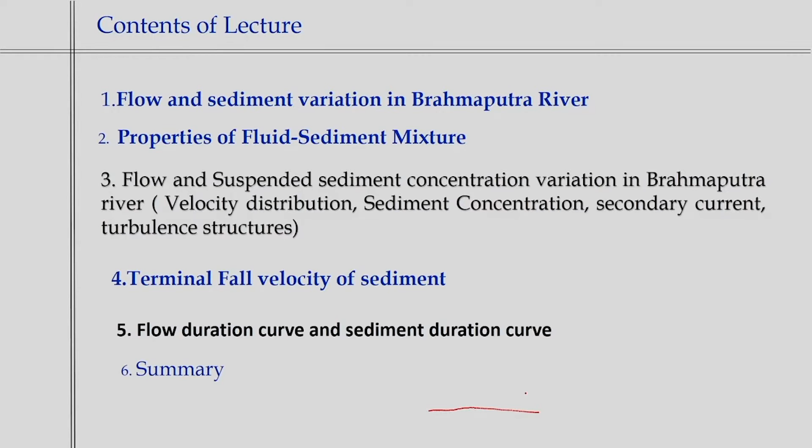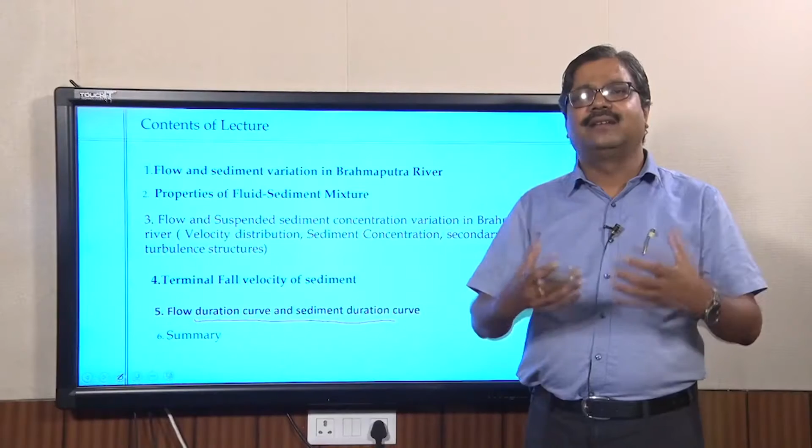Again I will come back to the river scales to show how flow and suspended sediment concentration varies. Then we'll come back to sediment particles and discuss what the terminal velocity of sediment particles would be, both theoretically and combined with experimental findings. Then, very interestingly, we'll talk about the flow duration curve and sediment duration curve analysis at river reach scales, and conclude these lectures.

Let's go to the next slide where I'm showing the river survey of the Brahmaputra river. If you look at these satellite photographs from Google Earth, the river width at this stretch comes to more than 10 kilometers. So you can understand what the width of the river is - 10 kilometers - that's the width of this river.

Not only that, if you look at the flow variability, the discharge variability - how much discharge varies in these rivers. For low flow, it starts at about 3000 meter cube per second. It's very low flow. During the dry seasons, we'll have flow which is about 3000 meter cube per second. 1 meter cube is equivalent to 1000 liters, so you can understand how much water is flowing.

The average flow of this river comes to about 12,000 meter cube per second - so much variability of flow. Average flow is 12,000 and low flow is 3,000 meter cube per second, and the maximum flow observed during a 10-year return period flood comes to about 40,000 meter cube per second. So it's a mega river system. The flow variability starts from 3,000 to average 12,000, then goes up to 40,000.

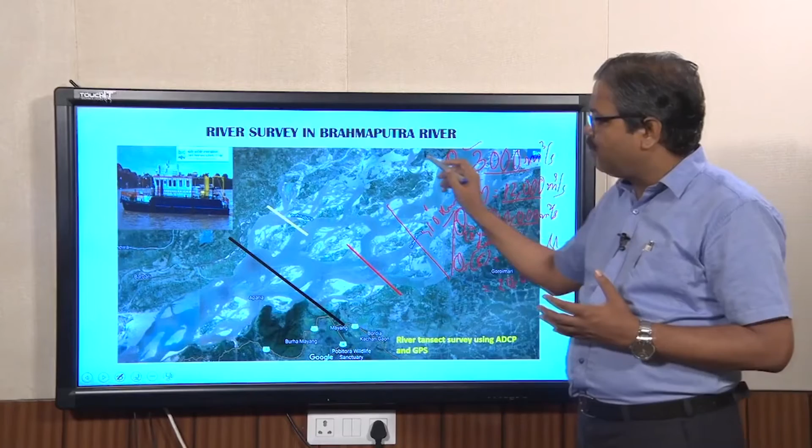You can see such a complex river system, confluencing, deconfluencing, forming bars and all. So if we look at this type of river system and try to understand rivers, we need knowledge on how sediment-laden water flow happens, how mechanics is developed in that, and how far we can understand it. That's the basic objective of this course - to take it to a level where we can understand such complex river systems, how the morphology is changing, and how sediment erosion and deposition are happening.

All this process we try to understand with our basic knowledge of fluvial hydrodynamics. We will talk about more details. The river doesn't mean just water flow, it's a mixture of fluid and sediments. There is always sediment present, except in very low flow periods, and sediment concentration increases exponentially when we have a larger flood or event. So mostly we try to understand how these fluid-sediment mixtures happen.

If you talk about sediment concentration, it's a very simple concept. If you take a control volume, Vs is the volume of the sediment particles, Vf is the volume of the fluid, the total volume of this control volume will be Vf plus Vs. The sediment concentration by volume will be Vs divided by Vf plus Vs. So as sediment Vs increases, C will increase.

That's very basic. Most of the time we don't do analysis at the volumetric level, we do it at mass conservation equations, momentum equations, energy equations. So we always link with mass, not volume. If I find out the concentration by mass, denoted as small c, that's the mass component of the sediment particles divided by the total mass of the system, which is easy, just multiply by the respective density - rho s stands for density of sediment particles, rho stands for density of water. So you can compute the sediment concentration by mass.

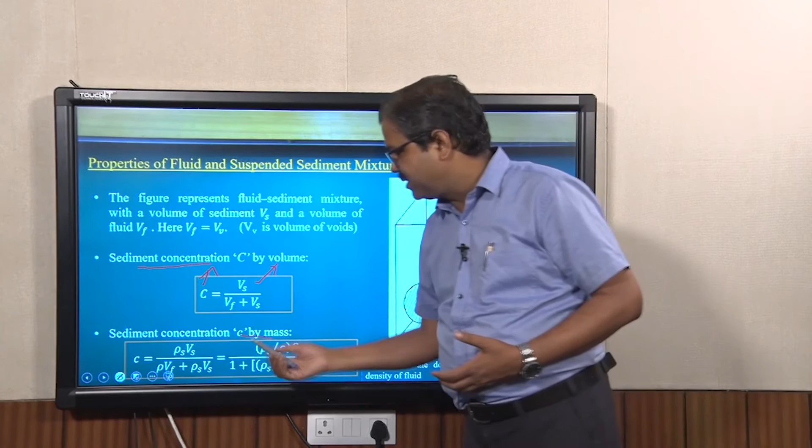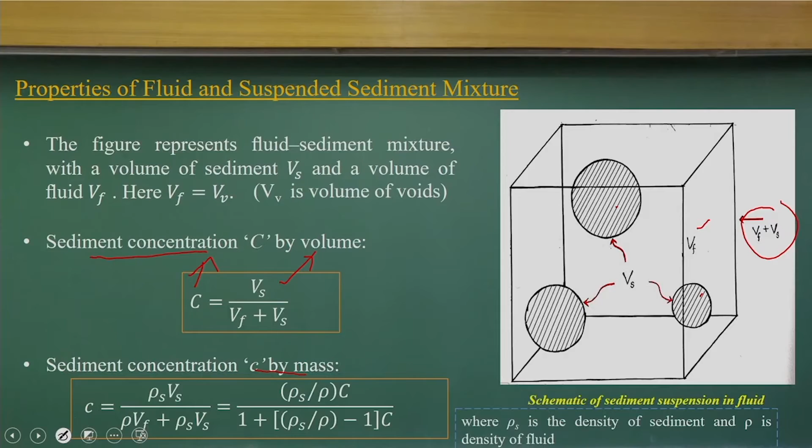This C by mass tells how much sediment concentration happens per unit volume, and if you substitute to capital C, you get it in these terms. So don't confuse whether C is in terms of volume or mass - you can convert between them. If volume level data is given, you convert it to mass level, or vice versa. It's a very simple calculation to find the concentration.

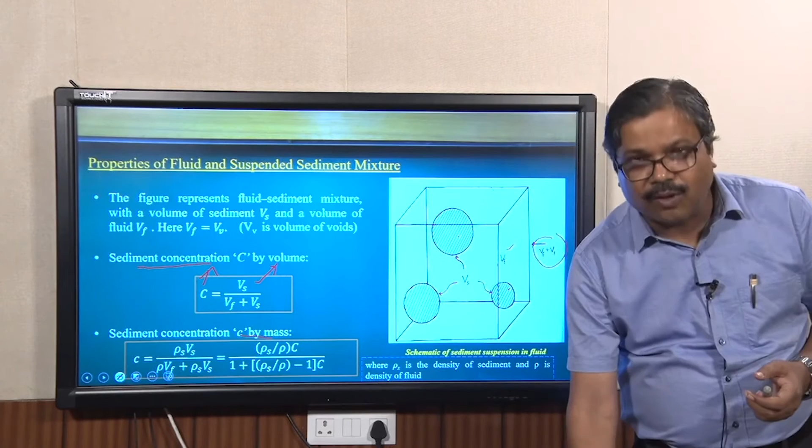When you talk about fluid and sediment mixtures, what will be the density? We find mass per unit volume for the mixture as the sum of the liquid part and the sediment part - the mass is the sum of the mass of the water part and the sediment particles part. The same way we get the specific weight of the fluid and sediment mixtures. Again, this is a fluid sediment mixture, try to understand that.

Now, many times in fluid mechanics flow we talk about Newton's law of viscosity - that is Newtonian fluids, the relationship between shear stress and shear strain rate, related through dynamic viscosity. Because we use fluid and sediment mixtures, the dynamic viscosity will not exactly be that of water. Experimental data clearly establishes that the fluid and sediment mixture's dynamic viscosity is a function of the dynamic viscosity of water and correction factors for the sediment concentration.

C is in terms of the volumetric sediment concentration - the fluid is mixed with sediment particles, try to understand this. As I increase the sediment concentration, there will be more viscosity. That's the correction factor from Bagnold's paper - these are all values more than one, so that's the correction factor. If I consider the fluid sediment mixture and I know the C value, I can compute the dynamic viscosity of the water and sediment mixture, which is necessary for us.

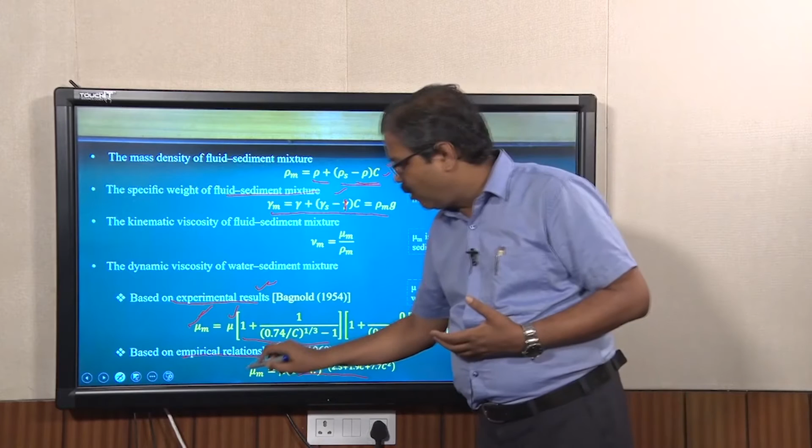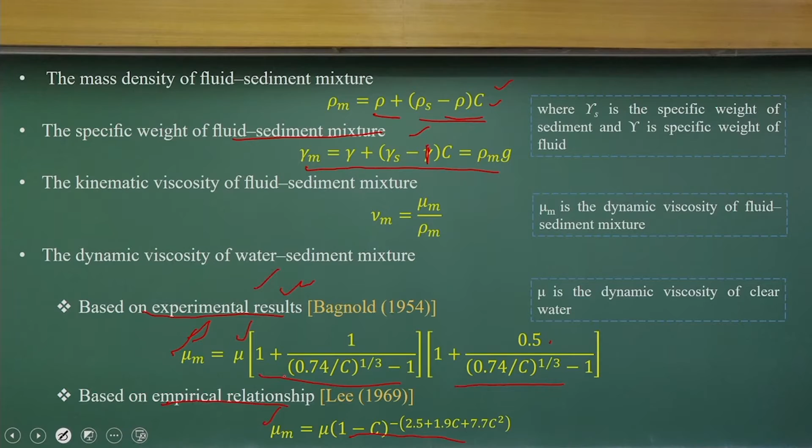We can find out the dynamic viscosity of the water and sediment mixture particles from experimental data. Let me go through a very simple example to show how we can compute it. Consider a volume of 2×10^-3 meter cube of river water, evaporated to collect the suspended sediment concentration, which gives us the weight of the sediment.

Then you have the D50 value and the specific gravity S. You try to compute the C value, the sediment concentration by volume and by mass, then find the mass density, specific weight, and dynamic viscosity of the fluid-sediment mixture, given mu for clear water. These are simple problems applying the formulas discussed earlier. The only difference is that from the specific weight we can find the Vs value, and knowing Vf, we can compute capital C and small c.

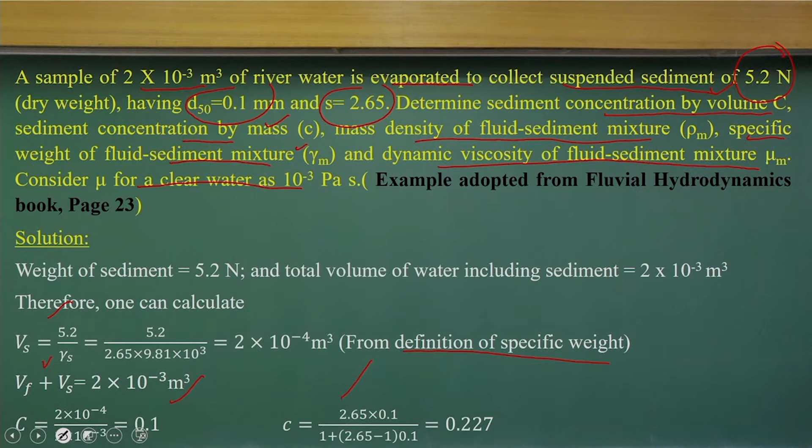Same way, if I apply it, I can get the density of the fluid and sediment mixture, which is much higher than the water density of 1000 kg per meter cube. Because of the presence of the sediment mixture, the density of the water and sediment mixture is more than 1000 kg per meter cube, which comes out to 1165 kg per meter cube.

Same way you can compute the dynamic viscosity. Just substitute the C value, with mu known to us. You can see that mu-m is a higher value than clear water because of the presence of the sediment concentration factors.

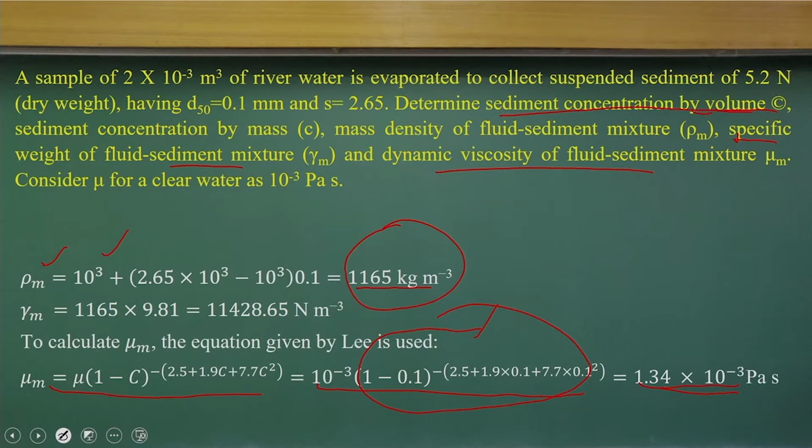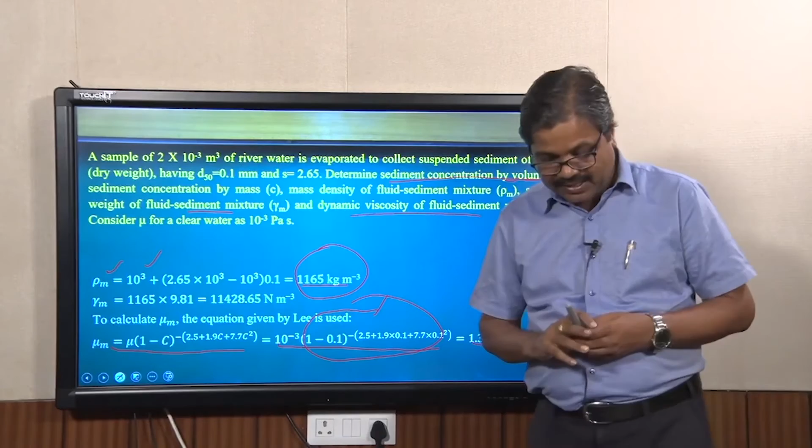This is a simple example to demonstrate how we can compute things if we know the sediment concentration. You go to the river, collect suspended water samples, evaporate them, weigh the evaporated suspended sediment, then do this type of calculation to find the dynamic viscosity, specific weight of the sediment particles, and sediment concentration by volume and mass. We can do this easily: just go to the river, collect water samples, do the evaporation, find the remaining solid sediment particles, take the weight, and find out all these fluid-sediment properties. That's the basic procedure. Now let's go to the next slides.

Again I am coming back to the river. So, the Brahmaputra river - as I introduced earlier, we are fortunate to have collaborations with the Inland Waterways Authority of India to do extensive river surveys of these big river systems, 10 km wide. I present this interesting data to you: if you go to a river like this, with a 10 kilometer reach, we cannot do simple surveys. We need survey vessels equipped with global positioning systems.

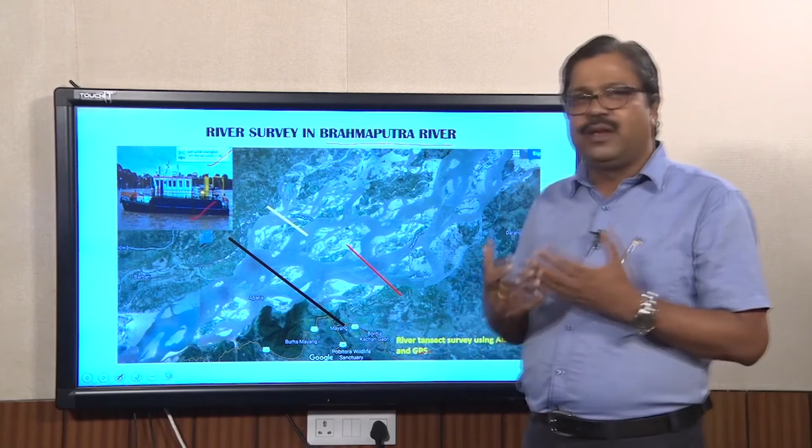Everywhere now we have global positioning systems equipped with ADCP, acoustic Doppler current profilers, which measure the three-dimensional velocity components, the depth, and the suspended sediment concentrations. More details you can browse through the literature to see what ADCP is and how to use it. When you use these survey vessels equipped with GPS, ADCP, and echo sounders to survey a transect of more than 10 kilometers width, it takes more than 5 hours. So it's not an easy job to survey a river like the Brahmaputra with a 10 kilometer width.

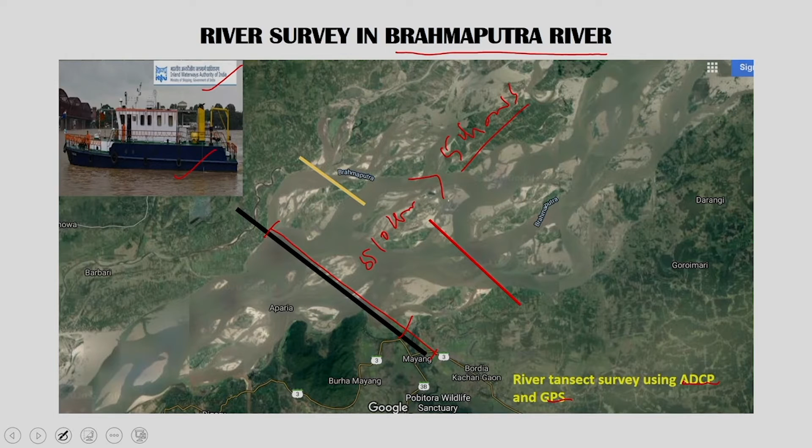Let me present the data to show how complex these rivers are - we cannot simplify the river the way we usually do. This is raw data that we got in the field, not generated data. This is measured field data from the Brahmaputra.

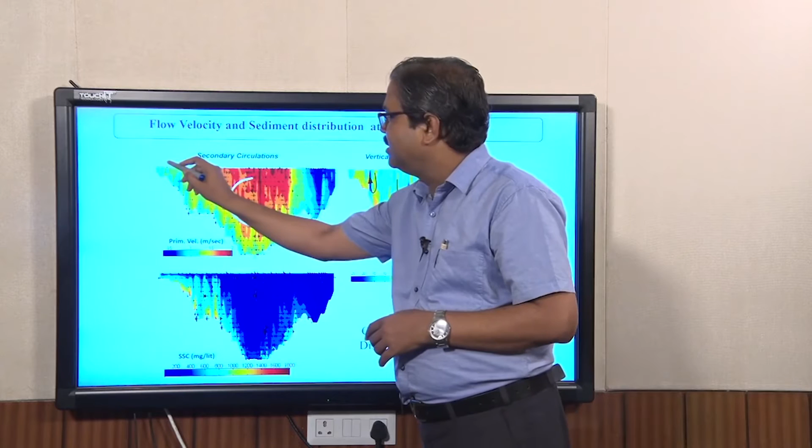If you look at the three velocity components - one is the primary velocity component in the longitudinal direction, there is a vertical velocity component, and a horizontal one perpendicular to that. This is the cross section, with a width of a few kilometers, and these colors represent different velocities. If you look at the red color zones, they represent about 2 meters per second.

If you look at the core zone, the velocity is about 2 meters per second, but there are reaches where the velocity is lesser than 0.3 meters per second, 1 foot per second. There are also reaches where the velocity is more than 2 meters per second. That means the velocity variation is from 0.3 to 2 meters per second, almost 10 times.

Within these cross sections there is a velocity difference, and this is a natural river. You can see the velocity difference and how it shows up. That's what is called the primary direction.

But if you look at these velocity vectors given in the perpendicular to the longitudinal direction, you can see these velocity vectors, and from that you can see that large vortex formations are happening. That's what we call the secondary current. You can easily see that.

So when you measure this velocity using the ADCP, you can see these velocity variations in the longitudinal direction in a cross section. Similarly, there will be velocity variations perpendicular to that, and there are formations of secondary currents, which are large vortex formations. You can see it from that.

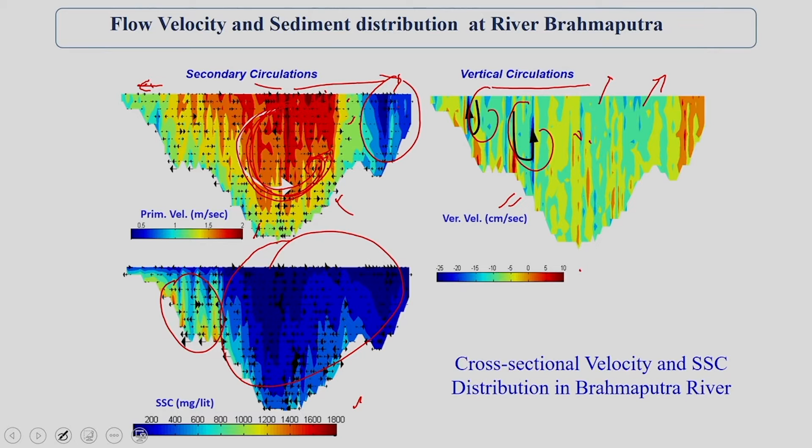If you look at the suspended sediment concentrations, which I said earlier ranges from 400 milligrams per liter to 20,000 milligrams per liter, you see these regions get on average 300 to 400 milligrams per liter. But there are stretches where sediment concentration can go as high as 800 milligrams per liter. Just look at the variability - these are original field survey data which we have. Nobody in the world has these data sets.

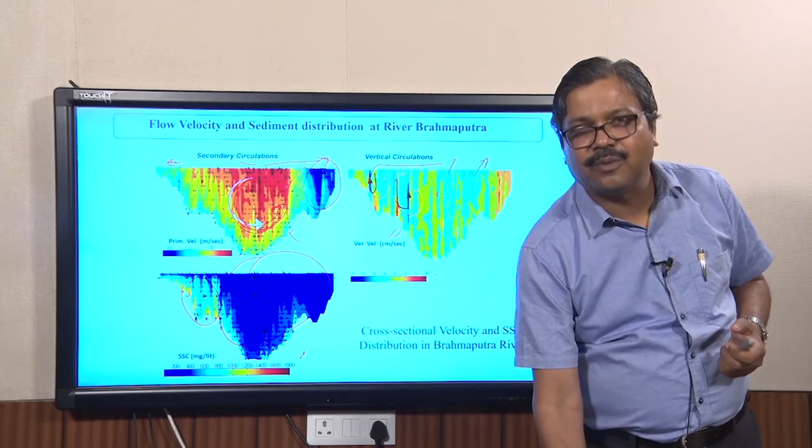There are formations of secondary current, and variability in primary velocity, vertical velocity, and suspended sediment concentrations. That's the reason the river is complex, and we try to understand the river from a mathematical point of view, a physical concept point of view, and also by conducting river-scale experiments - that's the strength of the work we are doing.

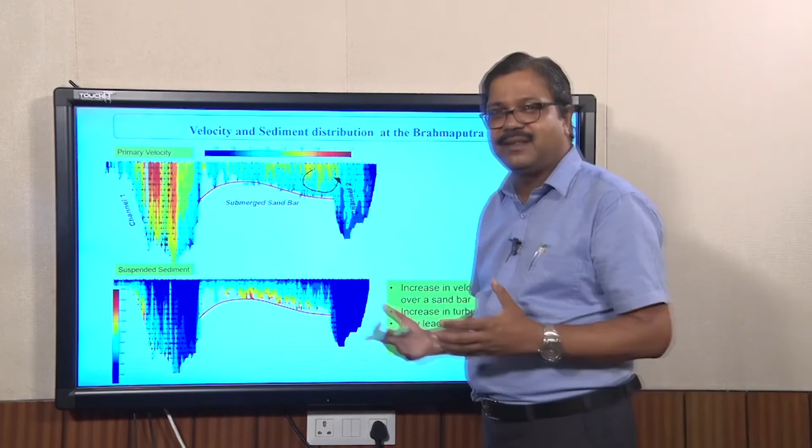If you look at that same concept for a larger width, in between there could be sandbar formations. If you look at how these primary velocity variations are there, it's too complex - how the secondary currents are there. All these suspended concentrations are available. All of this is built up with the secondary current

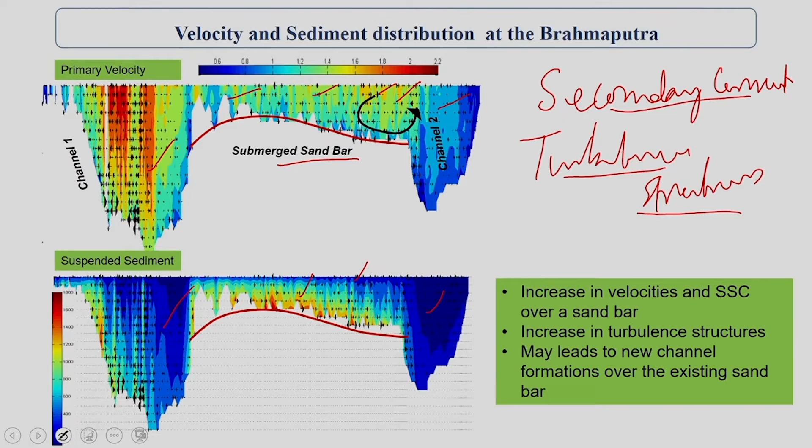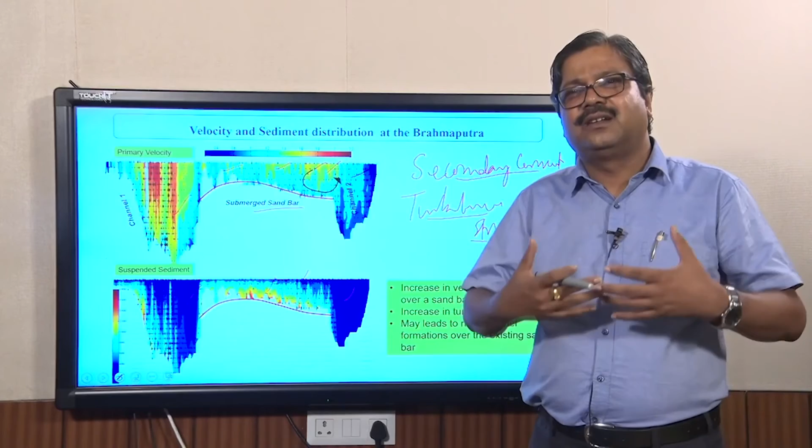and large scale turbulence structures. There are a lot of turbulent structures we can see in the Brahmaputra river, and a lot of secondary current formations which carry large flow and sediment mixtures, and this varies from season to season, day to day, and month to month - and also varies from year to year.

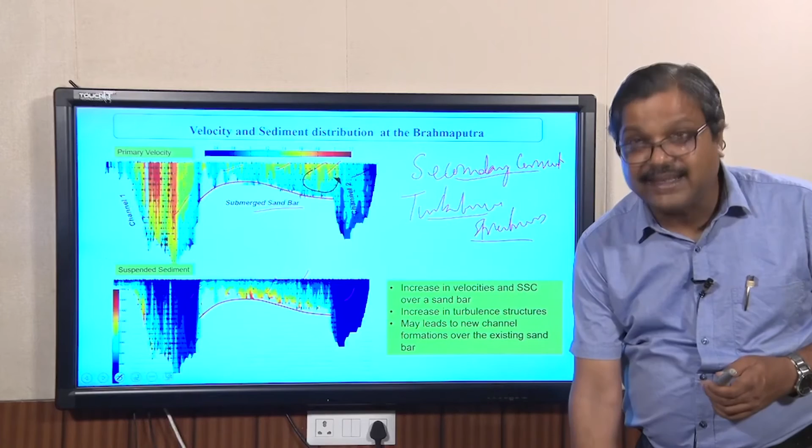So that's the complexity that comes as we change the sediment properties, as we observe at the field level. That's the strength of these lectures, and I hope you have enjoyed this lecture.

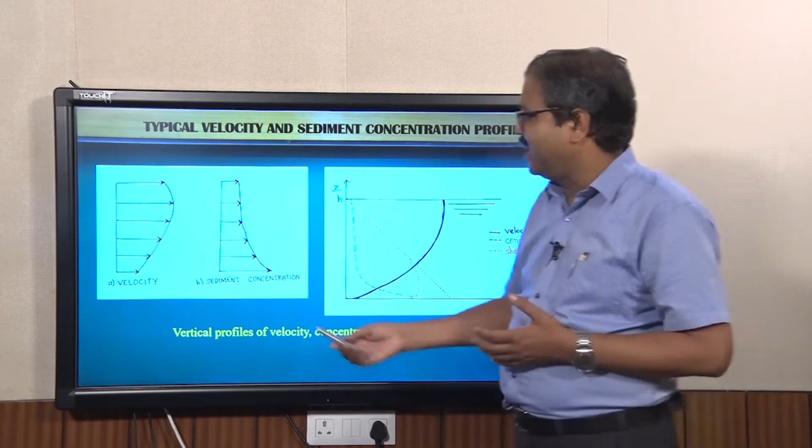If you look at a typical velocity diagram given in any river mechanics textbook, they say the velocity values follow a logarithmic distribution, and sediment concentrations from the free surface follow an exponential decay function. But does this happen for the Brahmaputra river? No.

Most river mechanics books consider this variability in terms of velocity distribution and suspended sediment concentration. One is velocity distribution with respect to depth, which they assume varies logarithmically from the bottom to the free surface zone. The suspended sediment concentration varies exponentially decaying from the free surface to the bed. But that doesn't happen in a complex river like the Brahmaputra. Anyway, we have to have all this textbook knowledge as well as our practical knowledge, and both combine to represent river mechanics in a different way.

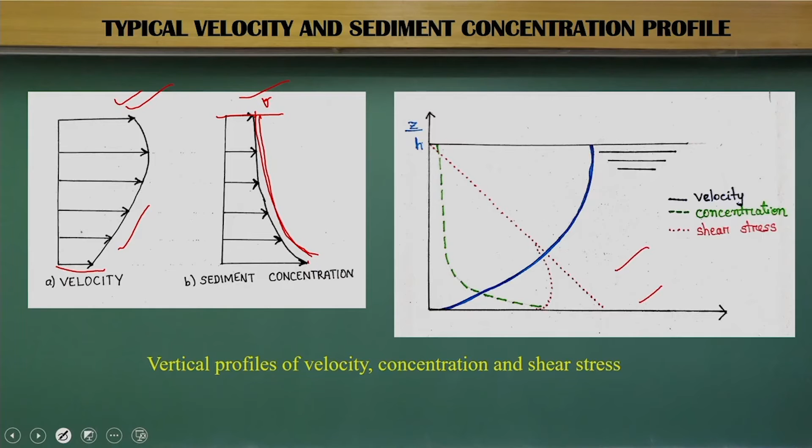That is my idea. More details we will talk about this shear stress formation and all when we go to the next levels. So let's go to the next one, which is the terminal fall velocity of spherical particles.

You know that any particle which falls from a certain height in the atmosphere attains a terminal velocity. Beyond that, the solid particle doesn't accelerate further; it attains a terminal velocity. That means, assuming a theoretically spherical object falling in a water column or atmospheric column, you will see it attains a terminal velocity. At that point there is no acceleration, and the velocity remains constant.

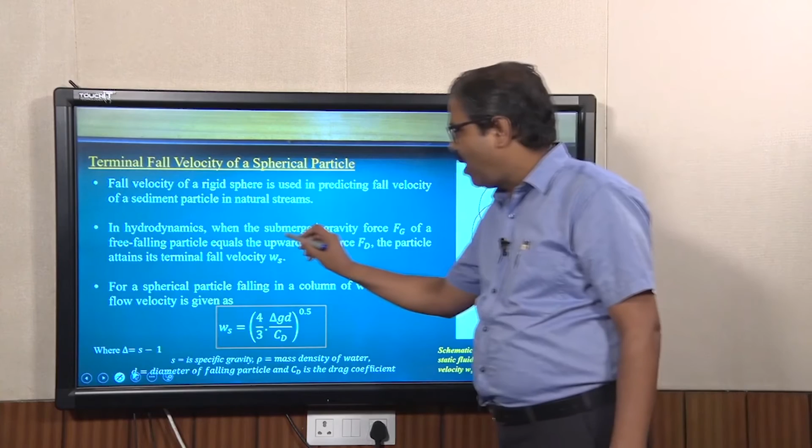This happens when the submerged gravity force equates to the upward drag force. Both forces balance each other, so the net force acting on the solid particle becomes zero. There is no acceleration, and it moves with a terminal velocity, or fall velocity, Ws. So we are just equating these two forces, the drag force and the submerged gravity force.

As you know, when the particle moves through the fluid, it creates a lot of vortex phenomena, the tail and vortex effects. Any fluid mechanics book explains that these vortex phenomena are responsible for the drag force components, whether the flow is laminar or turbulent.

So the drag force totally depends upon the flow Reynolds number. That is the concept. If you look at a particle falling in water bodies or atmospheric columns, it will have a terminal velocity. Just equating these two forces and rearranging the terms, you get these equations. It is very simple.

Look at this equation: the terminal fall velocity is a function of delta, where delta is S minus 1, that is specific gravity minus 1, times g, D is the diameter of the spherical object, and CD is your drag coefficient. So if I know the drag coefficient and the D value, I can find out the falling velocity, or terminal velocity, of the sediment particle.

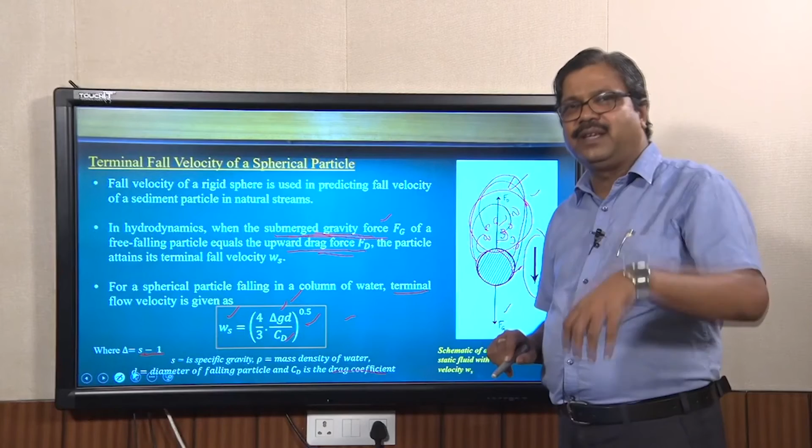This tells us how long it takes to reach the bed material. If it's falling without any flow, just in suspension, we can compute how much time it takes to reach the bed. If I know the terminal fall velocity and the length, I can compute how much time it takes. That's very easy.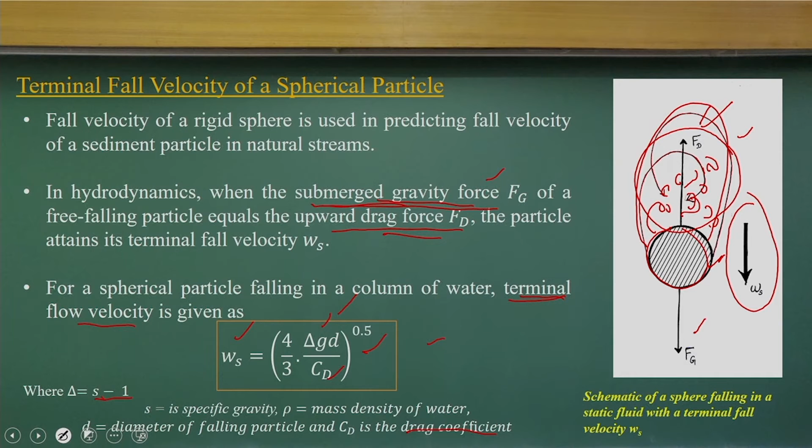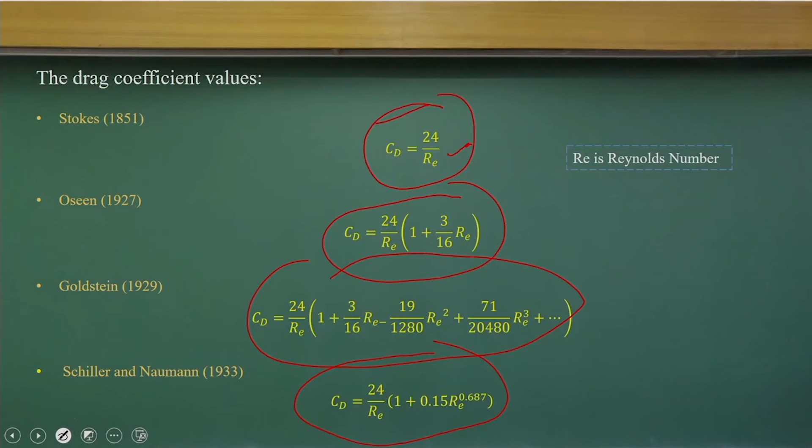Mostly any fluid mechanics textbook gives the CD for spherical objects. A lot of experimental studies over the last three to four decades have found the CD values for spherical objects. For low Reynolds numbers, when the flow is laminar, CD is a function of the Reynolds number, and if the flow is not laminar, there are more complex approximation functions to compute CD. So if you know CD and the flow Reynolds number, you can compute the falling velocity.

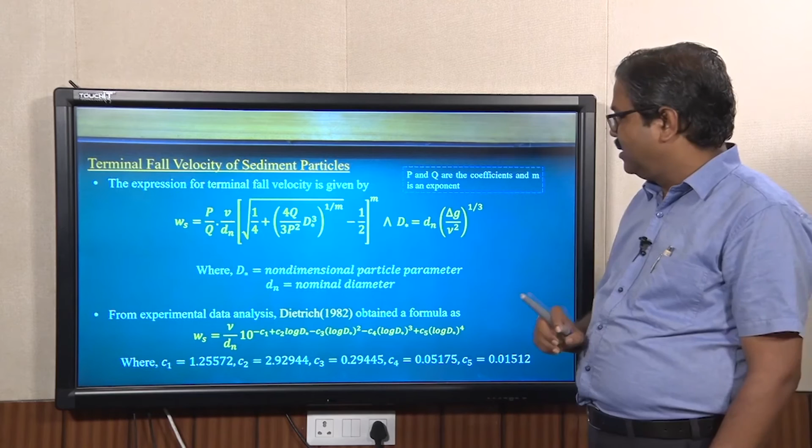But we are talking about the terminal velocity of sediment particles, and sediment particles are not spherical in shape. So for that we need correction factors. Through a series of experiments, terminal velocities have been established with coefficients P and Q, m is an exponent value, and d star depends on a non-dimensional particle parameter without dimensions, which involves dn, delta (S minus 1), g, and kinematic viscosity squared. dn stands for nominal diameter, as discussed in the previous class.

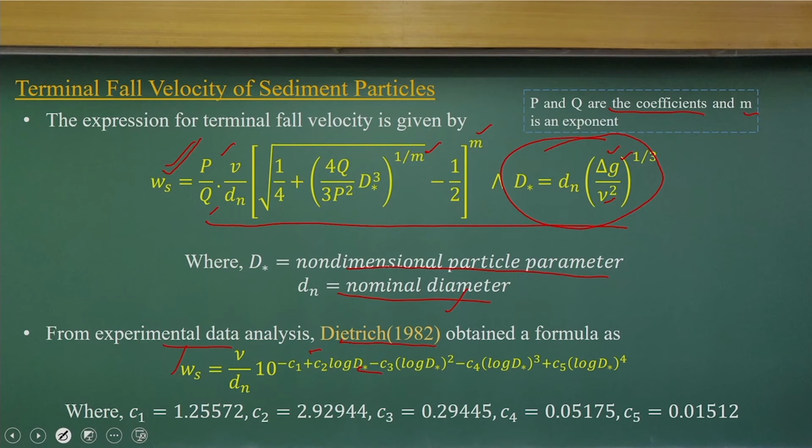So you can compute the fall velocity. Similarly, from experimental data, if you know the d star values and coefficients C1, C2, C4, C5, I can also compute it. These are experimental data by Dietrich in 1982. There are different equations, but more or less the results don't vary much. They are all empirical equations, and the computation of Ws doesn't vary much; it just gives a range of values without much difference.

Similarly, in the 2000s, Ahrens established more lengthy expressions to compute Ws. In 2003, again considering this non-dimensional particle parameter, the non-dimensional terminal fall velocity. So these approaches all go toward considering the particle parameters, developed to compute what will be W.

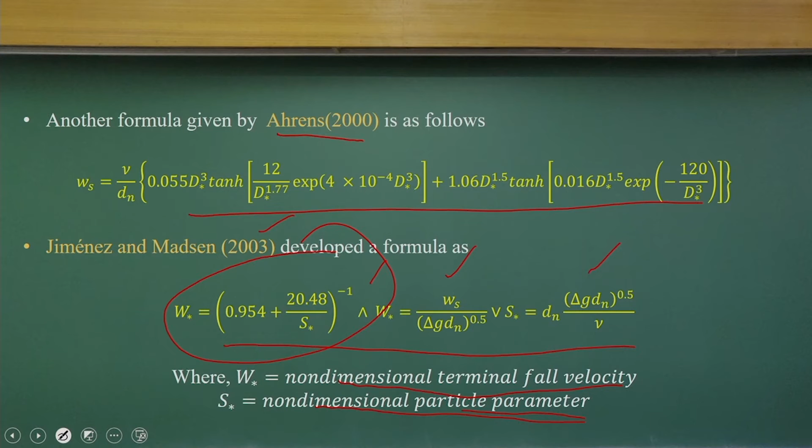These are non-dimensional levels, and given this, you compute what will be the terminal fall velocity of sediment particles.

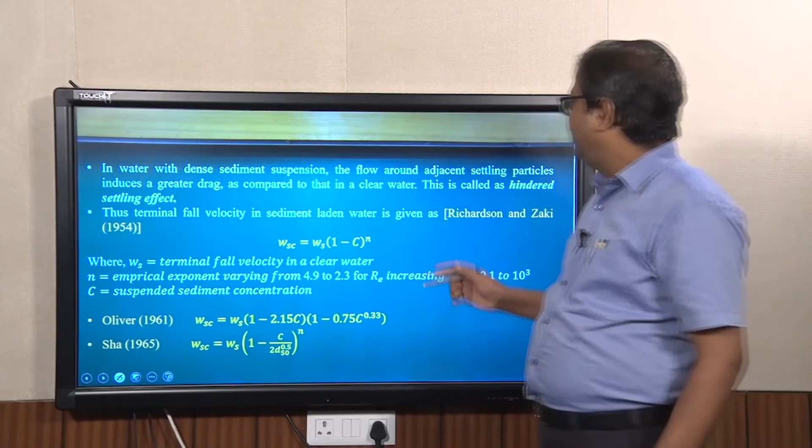As the monsoons come, more flow comes, more sediment supply comes from the land. So sediment concentrations are never constant, they vary. When you have higher sediment concentrations, there will be a reduction in the settling velocity of particles, because more drag force will be there. The more the concentration of sediment particles, the more the drag force. That is what we define as the hindered settling effect.

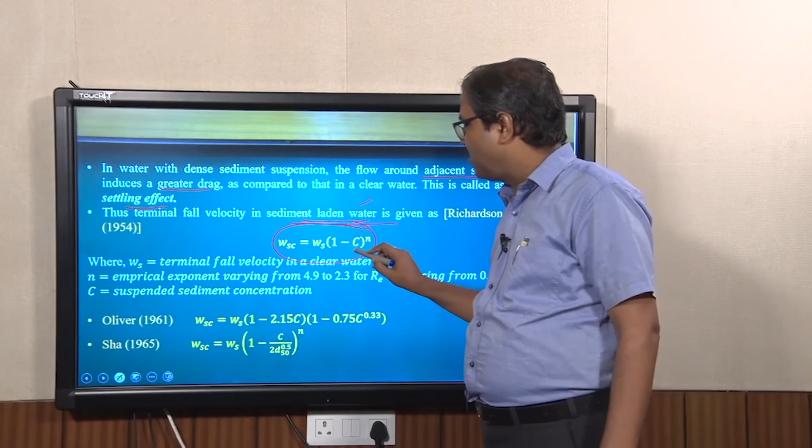Through a series of experiments, researchers developed ways to modify this terminal fall velocity for sediment-laden waters, like in a mud flow or flash flood, where a lot of sediment concentration comes in. At that time, the settling velocity, the terminal velocity we consider, should include a correction factor for the sediment concentration. The more the sediment concentration, the less the velocity, because more drag force is generated.

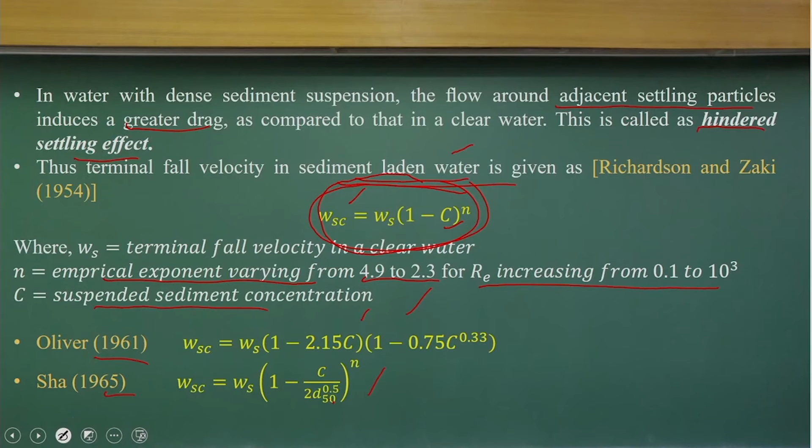That's why we have experimental equations like 1 minus c to the power n, where n is an empirical exponent component varying from 4.9 to 2.3 as Reynolds number increases, and c stands for suspended sediment concentration. There are empirical equations from 1961 and 1965 by different researchers, one in terms of d50 and another in terms of c only. You can find a series of such equations in any fluvial hydrodynamics book, since many researchers have worked to find the terminal velocity of sediment particles at different sediment concentrations.

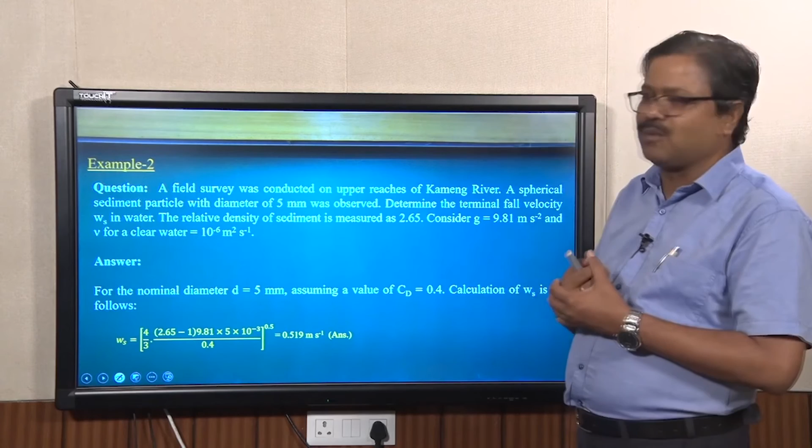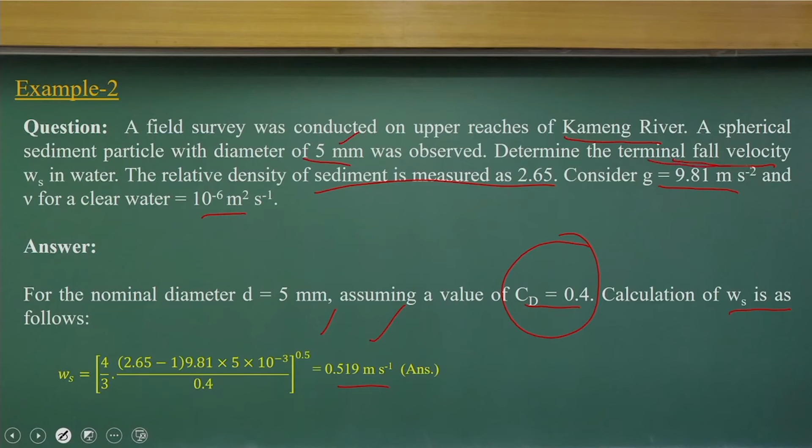Let's take a simple example. A field survey was conducted in the Kameng river, part of the Brahmaputra. The sediment particle size is 5 mm, and we need to determine the fall velocity. The relative density, g, and kinematic viscosity are given. Just substitute into the formulas to get the Ws value. Here you assume the CD value and compute using the formulas, showing that you can go to the field, collect the sediment, find the particle size and sediment concentration, and then determine the terminal fall velocity.

Before finishing this lecture, let's talk about how river flow varies day to day, season to season, year to year. As the flow varies, the sediment concentration carried by the river also varies from day to day, month to month, and year to year. That variability exists—how do you analyze it? It's a very simple analysis, which I will introduce today.

First, we plot a hydrograph, meaning discharge plotted against time period, with discharge shown in blue. You can see discharge versus time from 31st January to 07 March, a sample period of data showing the variability within a year. There will be low flow zones and high flow zones, and you can see the daily variation of the discharge, how the flow rate varies on a daily level.

The red color indicates the sediment concentration data, called the sediment graph. Interestingly, sediment concentration is given in grams per liter while discharge is given in its own units, and you can plot this as a flow-sediment hydrograph. Similar to how you go to a doctor for an X-ray report, whenever we start a river engineering project, we first look at how the flow variability and sediment variability behave, by drawing the flow hydrograph and sediment hydrograph, since that explains the river's behavior.

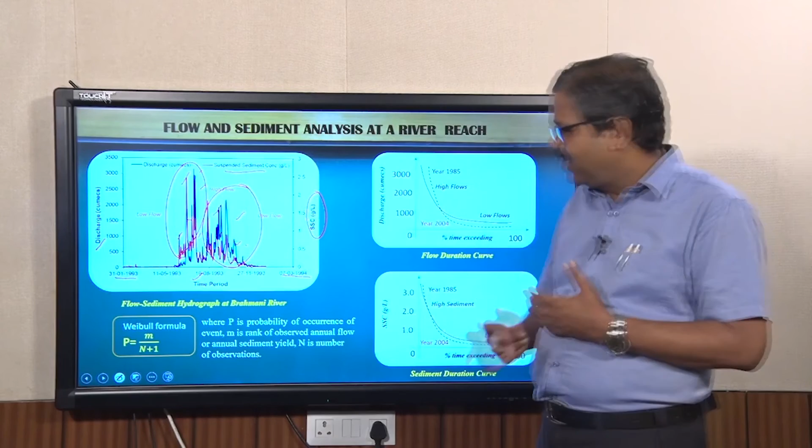We draw first the flow hydrograph and the sediment hydrographs, and we try to analyze how things are happening visually. First we try to understand it, then we go for a simple flow duration and sediment duration curve analysis.

What do we do? As you know from hydrology books, we follow a simple probability concept, the plotting position method, where probability p equals m by n plus 1, and n is the total number of data points, m is the ranking. So any data set you can arrange in descending order and rank the data. The m value is the rank value. For more detail you can refer to any hydrology book.

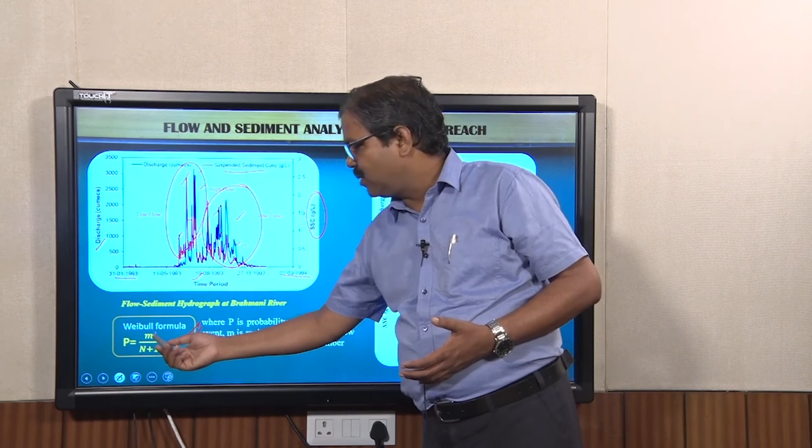So once you know the rank value and the n value, you can find the probability p. For example, if you have 365 days of daily discharge data, you can compute the rank of each value in terms of n plus 1 for a particular discharge. So you know p, the probability of occurrence, and the time period equals 1 by p. The time of occurrence is inversely proportional to p.

So once you know the probability, you can plot the percentage of time exceedance against discharge. That is what we call the flow duration curve. From the discharge data we can plot it, and after conducting this flow data analysis, we can develop a full flow duration curve.

In a similar way, we can develop the sediment duration curve. The sediment data can be sorted, ranked, the probability computed, the time periods computed, and you get a percentage of time exceedance varying from 0 to 100%, plotted against suspended sediment concentration.

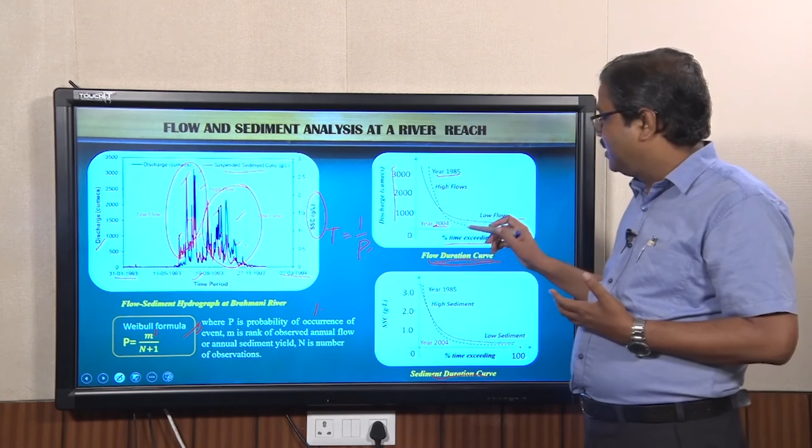Now if you try to interpret it, for example between two years, 1985 and 2004, the flow duration curve changes. It shows how river flows are changing because of anthropogenic activities and natural variability, how flows vary year to year. The low flow is increasing, high flow is decreasing. What is happening in this probabilistic space is exactly what the flow duration curve analysis reveals.

Similarly, the sediment duration curve shows how things change between two years, say 1985 and 2004. So the simple way we do this analysis: flow and sediment hydrograph analysis, flow duration curve analysis, and sediment duration curve analysis.

For more details you can follow any hydrology textbook, but in river engineering we cannot go into too much detail as we move to the next level.

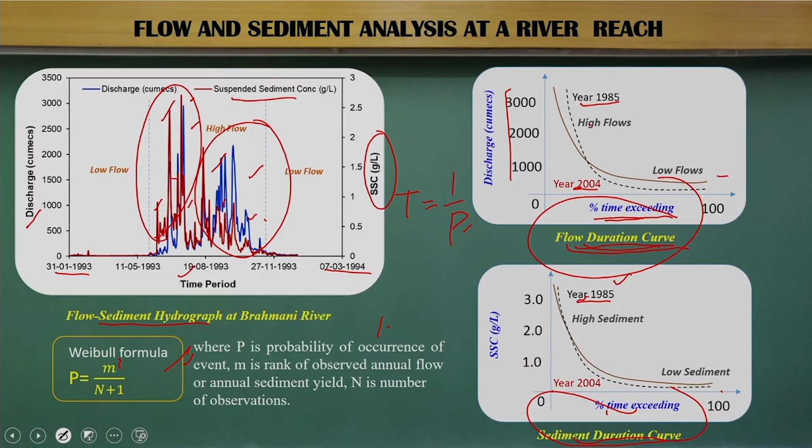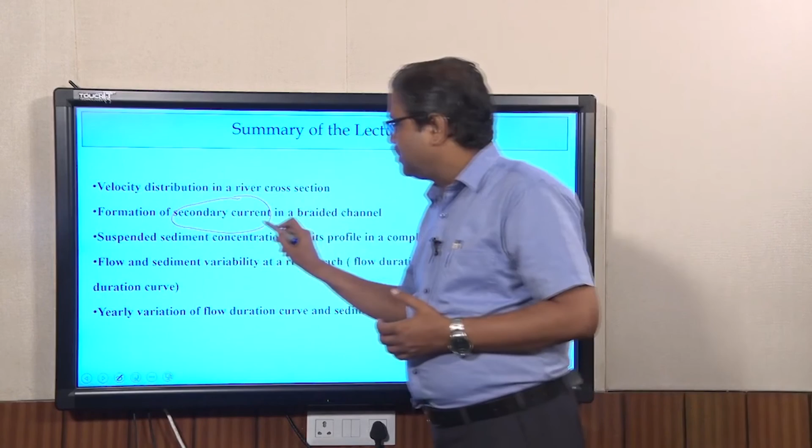With this, let me conclude today's lecture. We started by discussing terminal velocity and other concepts, just reviving that for you. We discussed secondary currents, remembering that secondary current generation happens in natural rivers, and that suspended sediment concentration has much more variability in complex river flow. It is not simply a logarithmic or exponential decay function.

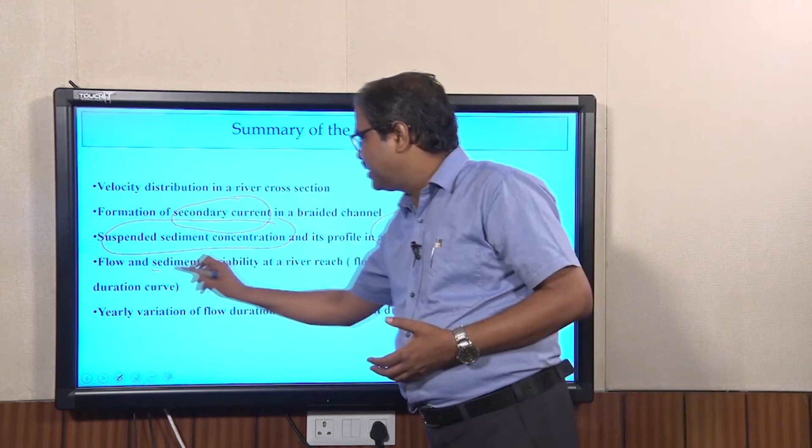We discussed the flow duration curve and sediment duration curve, and remember that these have variability both in the time domain and in the space domain. They vary from one river gauging station to another, and they also vary from year to year. So we should quantify these to understand what is happening in the river catchment.

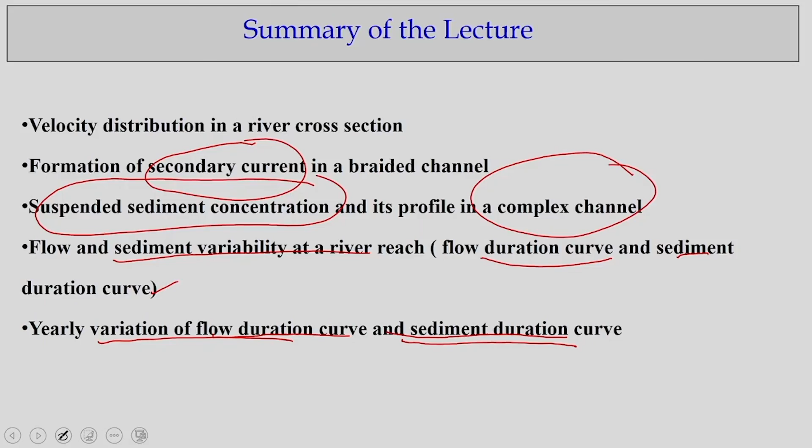The sediment and flow duration curves show the response happening at the catchment scale at a particular point, whether we are doing deforestation, building dam structures, or any anthropogenic effect—that is reflected in the flow duration curve and sediment duration curve. As I said earlier, it is like an X-ray of any disease, the way a doctor needs it. So we follow the flow duration curve and sediment duration curve.